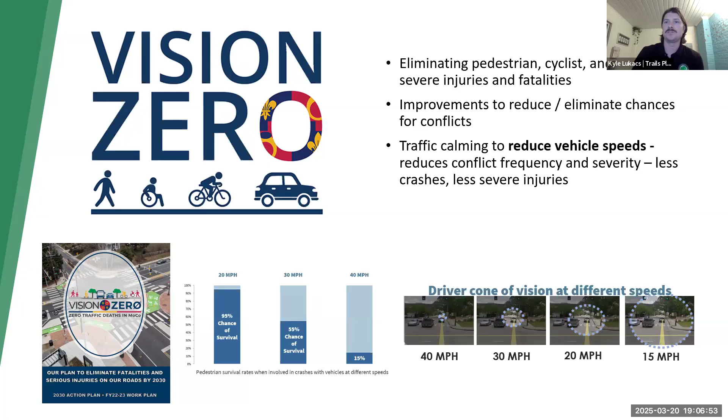We've got some images here on the bottom left — you can see a cover of the 2030 Vision Zero Action Plan. To the right, you can see how the chance of survival when a pedestrian is struck increases or decreases as speeds increase: 95% chance of survival at 20 miles an hour versus only 15% at 40 miles an hour. Finally, in the bottom right, there's a graphic showing driver cone of vision at different speeds — the faster you drive, the smaller that cone of vision gets.

Montgomery County, in their Vision Zero Action Plan, looked at the existing high injury network and used that to create a top 10 for state maintained priority roads and a top 10 for county maintained priority roads. I've got highlighted here — let me turn something on to help you guys see — Georgia Ave from University to Forest Glen, University, Georgia again, Connecticut, and Randolph. Several of the projects we have here are located right along those high injury networks or offer parallel routes to them.

This is a map showing those high injury networks I just mentioned, in red. You can see University Boulevard from Georgia all the way to Four Corners is one, most of Georgia is one, and parts of Connecticut and Veirs are as well.

In orange, you can see the projects we'll be discussing tonight: Arcola Ave, Sligo and University, Georgia and Evans Parkway, Sligo and Godwin, as well as 2 projects up near Matthew Henson Trail — we'll be talking about those tonight. The lines in purple show future projects. We've phased these Safe Streets and Roads for All projects so that we can focus on them and move them through.

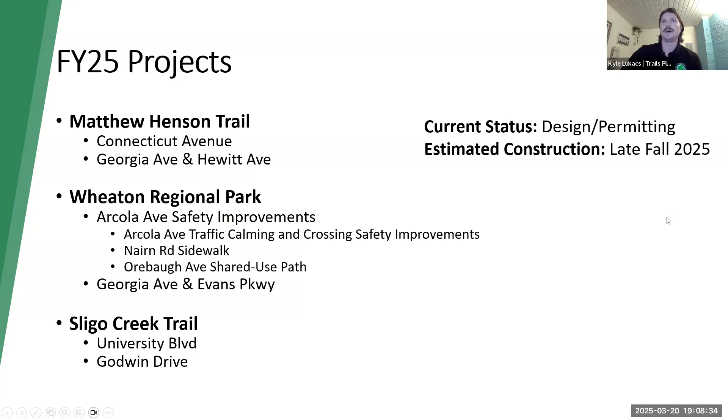So again, I just talked a little bit about the FY25 projects, but all of these are currently either in design or permitting, with the goal of getting to construction in late fall of this year or early next year. So with that, I'll hand it over to my coworker, Andrew Tsai, project manager and engineer, to talk about Matthew Henson Trail, Connecticut Avenue.

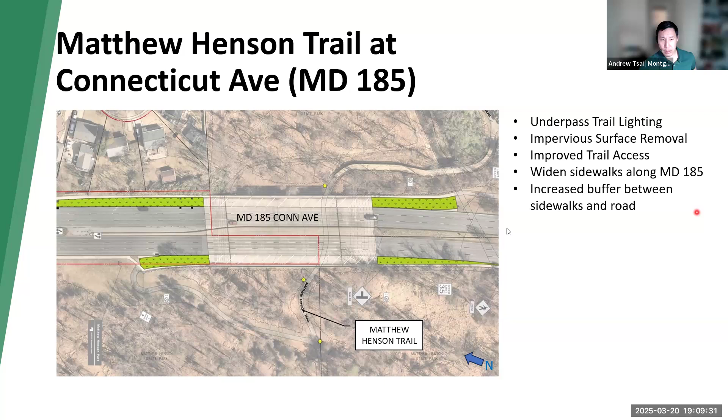We are going to be removing some extraneous legacy pavement from the old on-ramps onto Connecticut Avenue. I have a photo on the next slide that illustrates that a little bit—right here, you can see there are some old slip lanes that were never removed, so we're going to remove them.

The benefit of doing that is not only environmental benefits, but we can actually widen the existing sidewalks and provide additional grass buffer between the road and the sidewalks. Right now, Connecticut Avenue is a very high-speed road, like many state highways, so by providing a little more buffer, a wider sidewalk, additional separation, it makes walking along that segment of the road less stressful and safer.

Next location I want to highlight is Georgia Avenue, Maryland 97 at Hewitt Avenue. This location is about half a mile northeast of the Connecticut Avenue location. If you're familiar with this site, it has been the site of several crashes, some injuries. Georgia Avenue is a high-speed road.

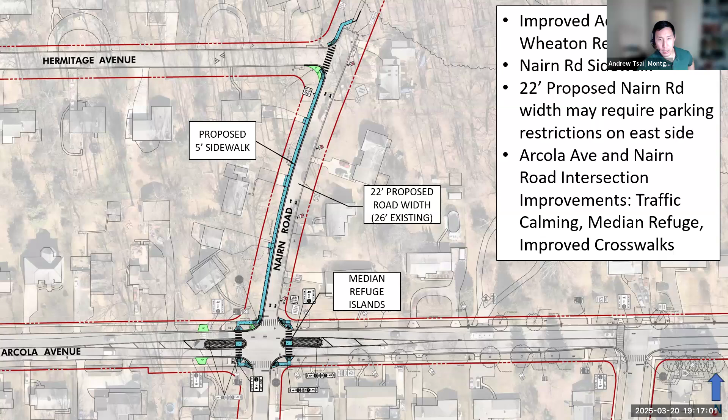We're also going to be improving the intersection at Arcola Avenue and Nairn Road—here's a zoom in. This is a protected median concrete refuge. Right now on Arcola we receive numerous complaints from residents that cars travel very quickly. By installing this type of refuge, it provides horizontal deflection, so a car has to slightly turn to avoid hitting that median refuge.

We're also narrowing the width of the lanes here down to 11 feet, all serving to slow cars down—both as they approach the intersection and as they may be approaching a bicyclist or walker trying to cross the roadway. So that's one of our traffic calming goals.

On the west leg of the intersection, there was an existing median refuge island, but essentially, if you were walking up Nairn, you would have to walk westbound to cross and then head back eastbound. So this is adding protected medians on both sides of the intersection, which will help greatly improve accessibility.

In addition to accessibility, all the improvements we're doing are going to include ADA accessible concrete ramps. We're going to try to make everything as ADA accessible as we can, just to improve access to our parks and along the public right of way.

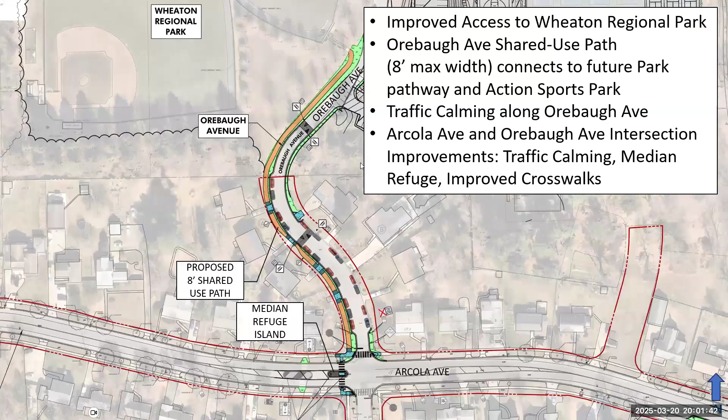Since nobody else has brought it up, I wanted to understand a little more about the trail behind Colt Terrace that is set to cross Arcola. There's a little stub on the other side of Arcola that's been there forever with a chain across it, and it doesn't go anywhere. You'd have to put a crossing there if you put a trail there. So I was wanting to know where that stub was going to go on the other side of Arcola, and why, because it would be a major disruption to put yet another trail through Sligo Creek Park there. Thanks for your question, Kathy.

We separately have a project to pave the existing maintenance road out to Kemp Mill, and then a later project as part of Safe Streets and Roads for All that will install a shared use path all the way up Kemp Mill to Randolph Road. So the long term goal is that from any point on Sligo, you would be able to continuously, on a paved trail, make it all the way to Kemp Mill and Randolph Road, which gets you close to some of the Poplar Run trails and other points north.

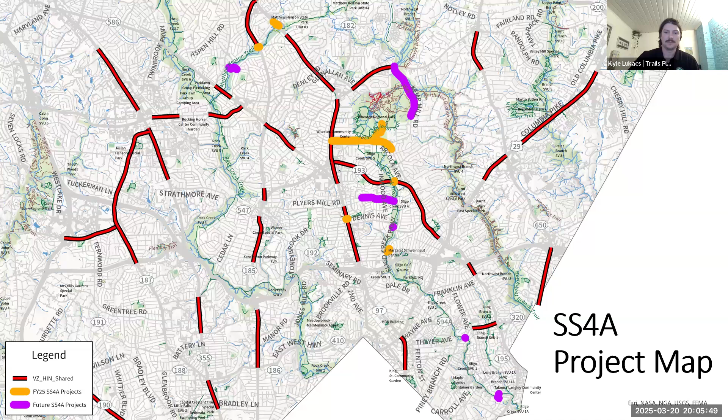Sorry, I'm searching for questions. You answered that quicker than I was ready for.

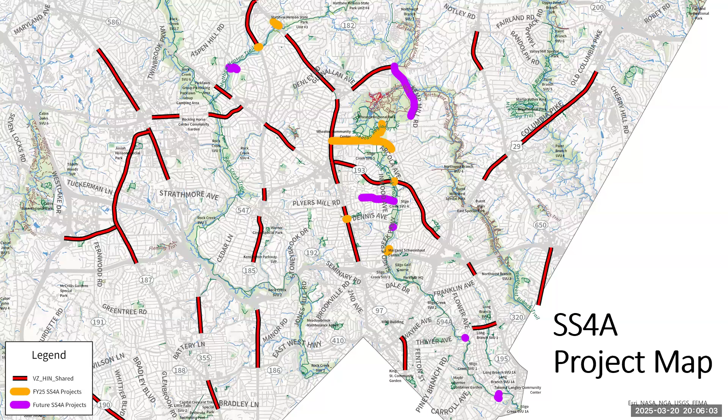So yeah, I saw some of those comments. I think that's the right read on it. Laura's point is that getting space away from the road when you need it isn't currently available.

All right, thank you, Kyle. It looks like we can go back to the hands being raised. I believe Vita will be asked to unmute. Hi, you're Vita's son. I'm Vita's son.

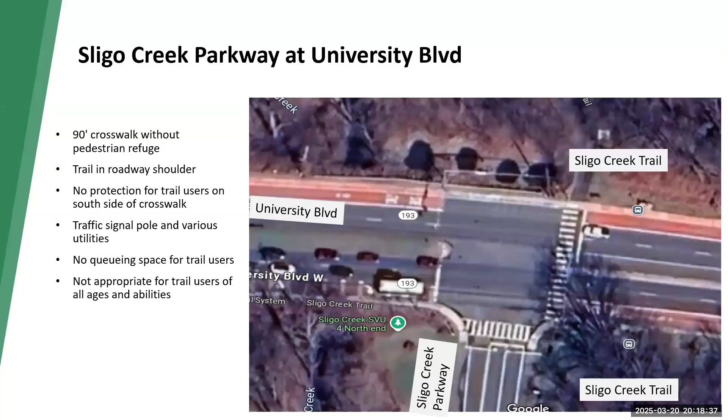Could Laura still be on the call? Can Laura talk about the Georgia Avenue, Evans Parkway crossing, and not only how wonderful it'll be to join the two parks together, but also about the bus stops that a lot of people use along Georgia Avenue, both north and south, at this intersection?

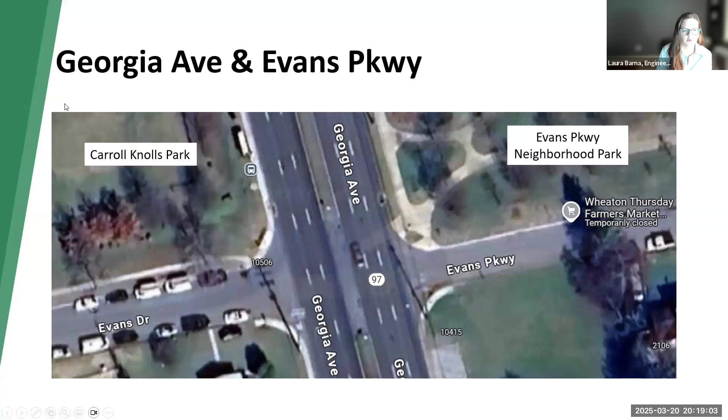Sure. So can you go back to the plan view, either the proposed or existing? So there is a bus stop on either side of Evans Parkway and Evans Drive. The northbound bus stop is right there, which you're pointing to, and the southbound bus stop is on the other side, near Carroll Knolls.

I think the bus riders would greatly benefit from this HAWK signal, to be able to use either their bus to go north and then to come home south, or vice versa. I think this would create a great benefit for transit users.

Thank you, Laura. Can I ask a very quick follow-up question? We are currently in Montgomery County trying to build more housing. We just completed a new housing development on Georgia Avenue near Forest Glen. Presumably, most of the folks living in this new housing are going to be taking buses.

And so I think we should all probably start thinking about taking buses more than driving our cars. I'm someone who drives a car, and I'm trying to take the bus more often because it's a lot less stressful. So if I can safely cross Georgia Avenue to get to the bus, I'm going to take the bus to get into downtown Silver Spring.

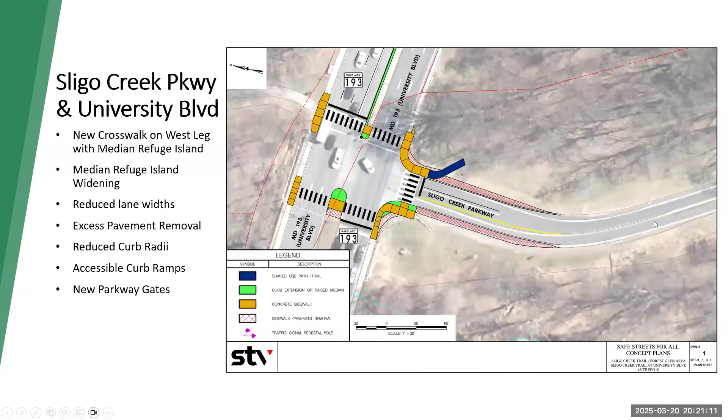I have a number of questions related to the intersection with Sligo and University, most of which I've put in the Q&A, but I'm happy to send those privately by email. But my main question relates to the Sligo Creek section that's closed on Fridays as a whole.

First of all, federal employees have just returned to office, which in my experience on my daily commute has increased area traffic tremendously, not just on Sligo but really all over the place. Given that Friday is a work day for all of us, and is now an in-person work day for all those federal employees who are blessed to have in the area, I'm wondering what the rationale was behind closing Sligo on Fridays in the first place.

I understand it on Saturdays and Sundays, it's wonderful for recreation and my children love it. But I do wonder about Fridays. And specifically with this return to office for the federal government, if that timing study could be repeated, and if it might be time to reassess whether it's appropriate to close that area for 20% of the work week. Thank you so much.

Yeah, so I can speak to this one a little bit.

This section of Sligo Creek, the open parkway, has been closed Friday, Saturday, Sunday since its inception in April 2020. Especially during the summer months, you get nice Friday afternoons. I actually live on one of the roads parallel to Sligo Creek Parkway, so I live on one of the overflow roads for when this is closed. I know DOT has done studies, and the traffic increase on the road I live on is pretty minor. But generally speaking, I think it brings up a question of what's the purpose of our parkways - are they commuter thoroughfares? They certainly provide that benefit.

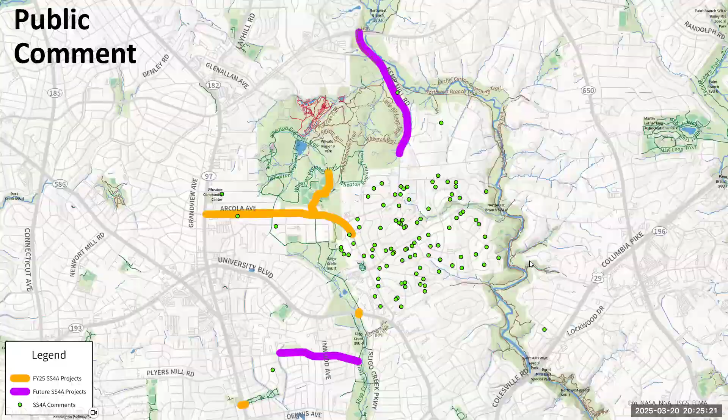But a big theme about Kemp Mill is that we're in a position - and what we've seen with the University Boulevard Corridor Plan and the 2021 bike pilot - is that promises were made that, like the yields at Arcola, there would be no effect, and they were not kept, because we saw backup to the Kemp Mill Shopping Center. We saw delays like we've never seen before. And that's what's inevitably going to be happening with Sligo Creek. I mentioned an 80-second delay because the light cycle is 80 seconds - if there's a left turning vehicle in front of you and you're making a right, you're going to wait 80 seconds.

And Dennis, although it could be a good alternative, that stretch - if you need to get to Arcola Avenue, which again has over 15,000 vehicles, and Kemp Mill Road, which has over 10,000 vehicles, which leads to Randolph and New Hampshire - people aren't going to take Dennis to go all the way out and then back in to get to Arcola. That just doesn't make sense.

Another theme is Sligo Creek, where you're mentioning there's 1,000 vehicles - I find it very, very hard to believe the data. I still want confirmation about my data regarding the Federal Highway Administration, where there's a 40% difference in discrepancy of fatality rates. But you look at Sligo Creek - if I need to get to downtown Silver Spring, if I need to get to downtown DC, which is what we're seeing a lot with federal workers returning back into office, every single navigation service, Waze, Apple Maps, Google Maps, is always going to tell me to use Sligo Creek Parkway. Because another effect of what we're seeing on Georgia Avenue, especially with the bus lanes, which is a separate program and I will not be mentioning more than that, is that you can't use Georgia Avenue to get to DC anymore - you want to get on the Capital Beltway.

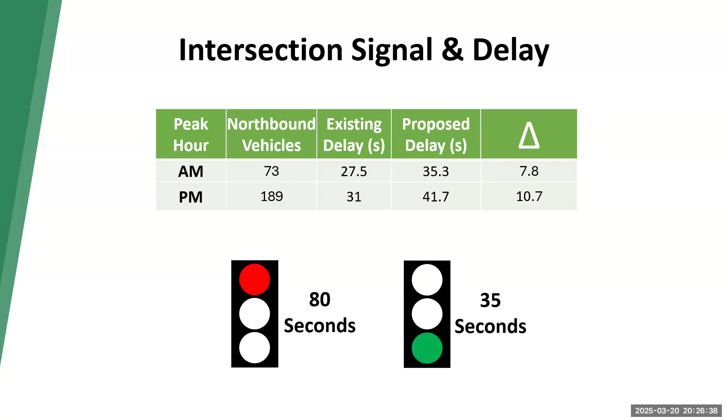I'm sure if you guys ever open the navigation service, what does it tell you? Sligo to Forest Glen to the Capital Beltway. And especially with people going back into the office, people going to Northern Virginia, even if they live up county, taking Sligo Creek to get where they need to go and coming back home and making that right turn. This is a very important thing.

And there will be up to an 80-second delay, not 10 seconds. Yeah, so thanks, Noam, for those comments.

A few things I'll say. The driving distance from Forest Glen and Sligo through to University and into Kemp Mill or Dennis University, it's about the same distance, 5 or 6 minutes either way. You can punch it into Google Maps and see. I understand it might not feel like the same driving pattern, but it's a comparable distance. As I said earlier, our parkways are not inherently designed for commuting, they're designed for recreational access, and there's a benefit of commuting.

And then the last thing, 80 seconds of red - that has an existing 30 to 40 second delay. It's not a current condition where you get to the intersection and immediately get to turn. There might be 2-3 cars in front of you turning. It's very common that there are queues at the start of a light, and almost every light cycle I've seen at this intersection clears by the end of that 35-second green.

So there's some great points. I appreciate you bringing some good comments here.

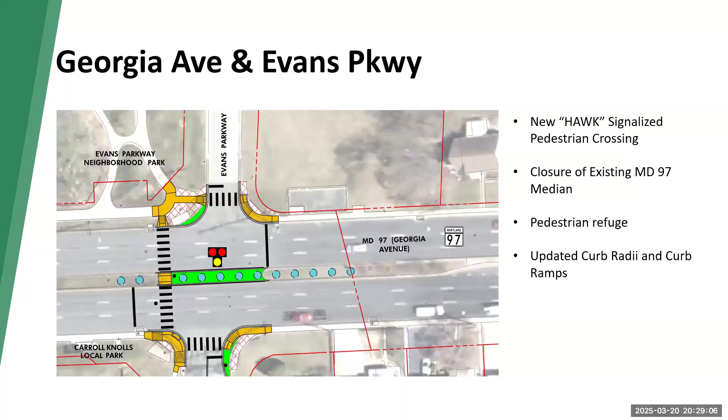Sure, these are great points that Noah made. Regarding the Arcola crossing, if you could pull up that slide - I know there's a bus stop that's currently where the Arcola crossing is. So by moving that crosswalk, will you also move the bus stop as well, so people can easily catch the bus going across Arcola, or are you going to leave those bus riders stranded without a crosswalk? Definitely don't want to leave any bus riders stranded, because that happens all the time when you're crossing Arcola - you're running for that bus.

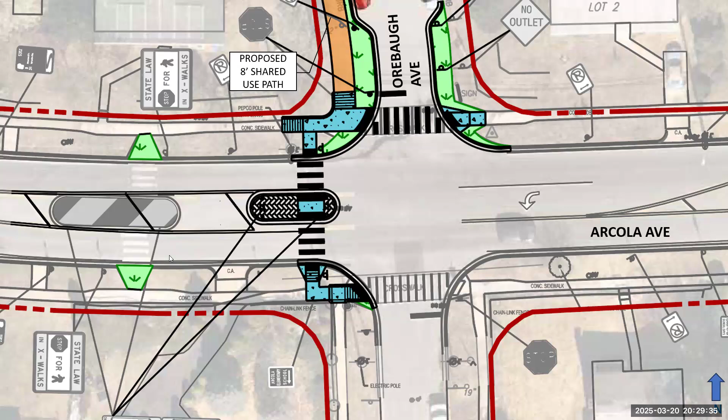Yeah, we're looking to make things to improve accessibility and improve how easy you can get around. So as these projects progress, we'll make sure we're speaking with our friends at MCDOT and their transit services division to get input on any changes or modifications we can make to improve bus service.

Yeah, Kyle covered a good part of that. In the Q&A, I saw a few questions related to bus stops. As these designs progress, one of the things we're working on is coordination with WMATA for Metro Bus, as well as MCDOT for Ride On buses, to confirm that the bus stop locations are either adequate where they are, or if shifting is needed, we can shift it as part of our design as well.